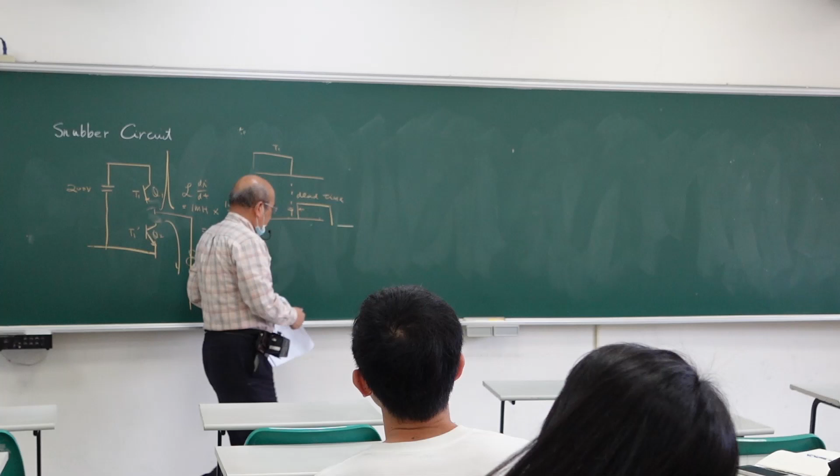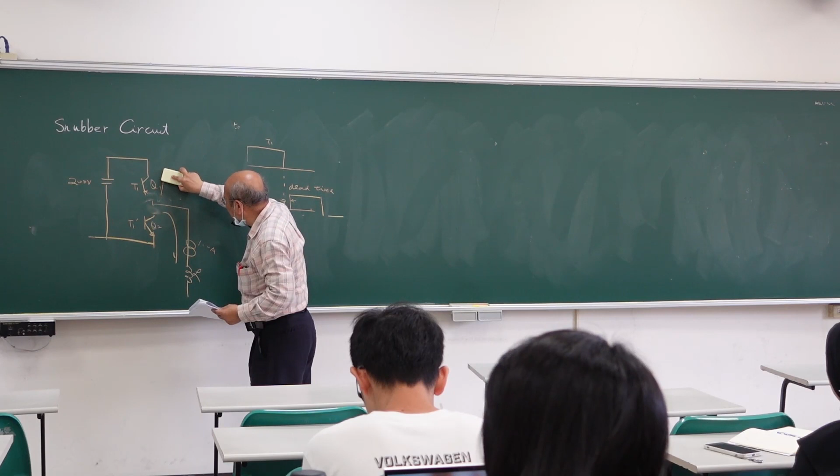You propose to your advisor that you have this problem, and your advisor asks you to propose some idea. So how can we solve this problem? You say, oh, it is okay, if I can put a free-wheeling diode here, maybe I can solve the problem.

So if the current goes here, you turn off Q1 and turn off Q2. Then the diode will automatically turn on, right? We can go to the diode. If the current goes this way, then we can go this diode, right? So the current goes this way, this diode automatically turns on. The current goes this way, this diode automatically turns on. Then we solve the problem.

Okay, we say, oh, it is good, and we can turn off the diode. So this is D2, automatically turn on. So you can see the D2 will fill this space, right? So the D2 is ideal, then no problem.

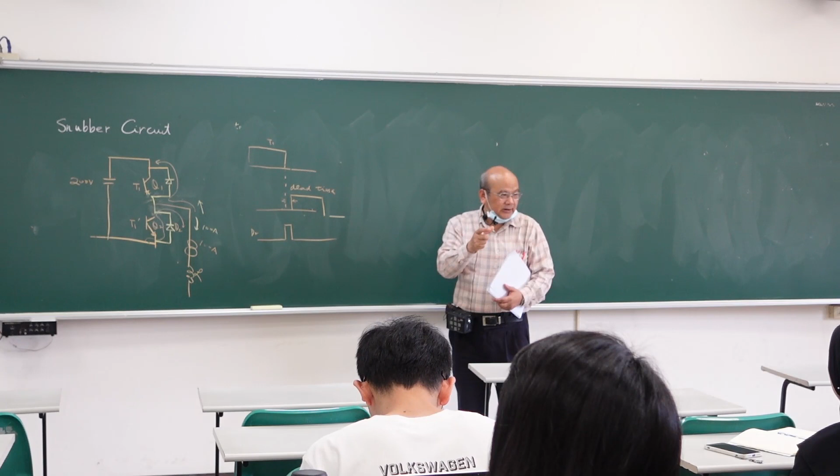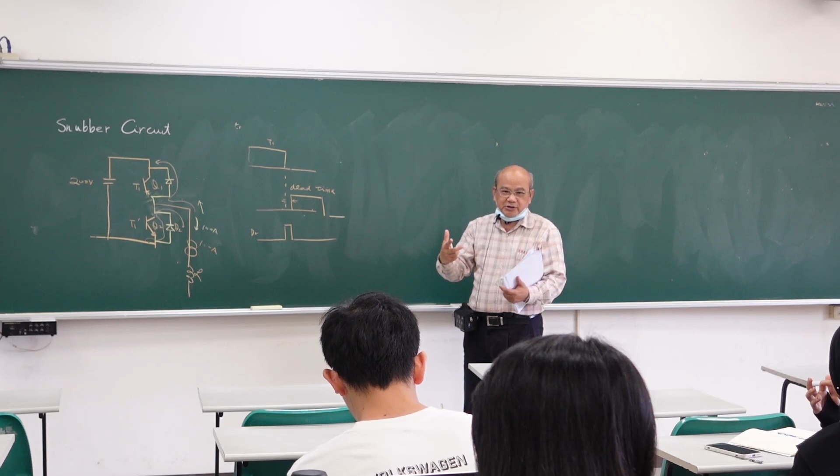But do you get any ideal diode? What is an ideal diode? If you want it to turn on, it immediately turns on. Do you think your diode will cause some delay? Yes, because it is a physical diode. So if you have a very physical diode, it could be like this.

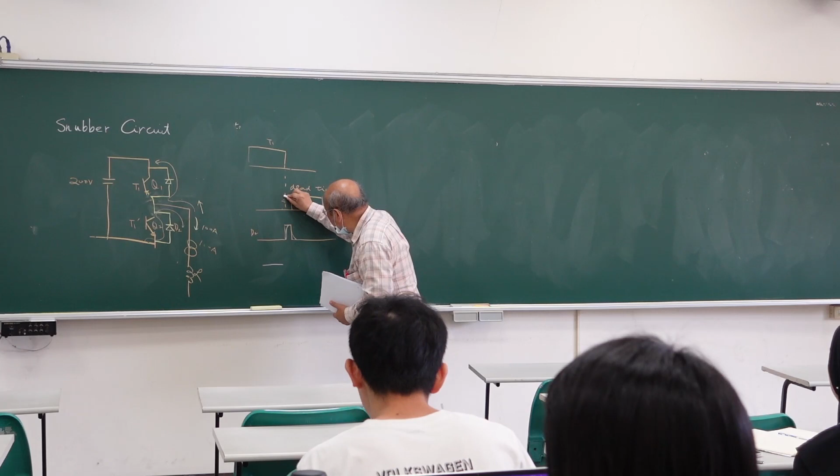It creates delay. So if it creates delay, then what happens? During this turn off, and the diode not turn on yet, then what happens? No path, right? No path. So now you turn off Q1, you turn off Q2, but the diode waits for 1 microsecond. But now you are waiting, so the diode is not turned on yet. Then everything turns off, then spike, right? So you still create a spike.

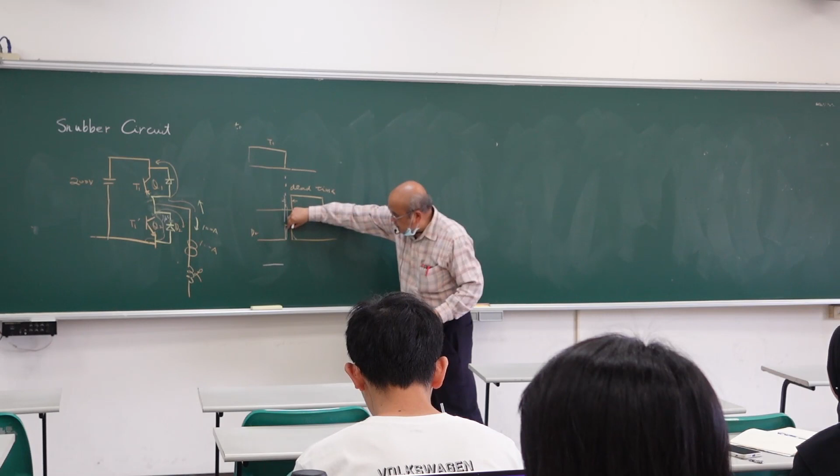So you think the diode can improve because it can improve this time interval, but not improve the whole interval, right? So after you try the diode, you say, I'm sorry, it doesn't work. Then what can you do?

So now you have to put some location to absorb the energy, right? Because you have inductor energy. Inductor energy should go somewhere. So if you have a flooding, the level of the river increases quickly, then you have to create some maybe lake or some river to get the water to flow out. Otherwise, this is a city, the water will go to the city, and every home will be flooded, right?

So we have to find a way to let the current go through. So how can you do this? There is one way. You say, oh, I can put a capacitor here. Maybe a capacitor here, capacitor here. And I can put a resistance here to limit the current going to the capacitor, not too huge, right?

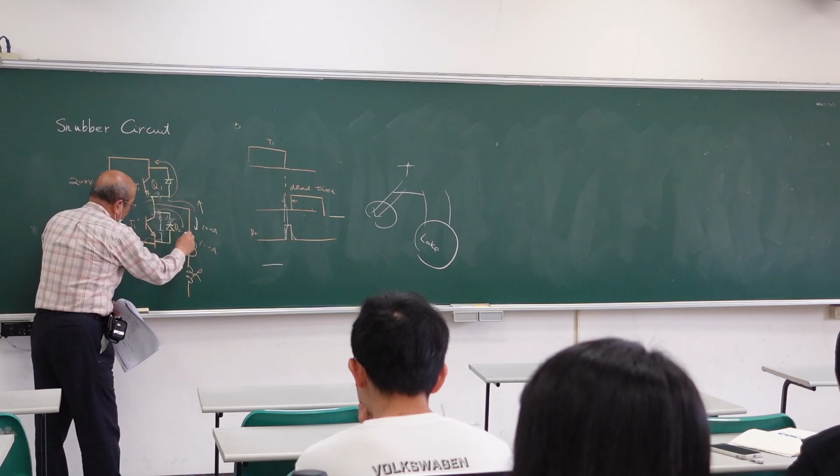Then after this turns off, this turns off, this turns off, then you have current here. Maybe you have current, we say, go this way, then what, or go this way. Then what happens? You have current go this way, then the current can go to the resistor, to the capacitor, and charge the capacitor, right? So the capacitor can absorb the energy, right?

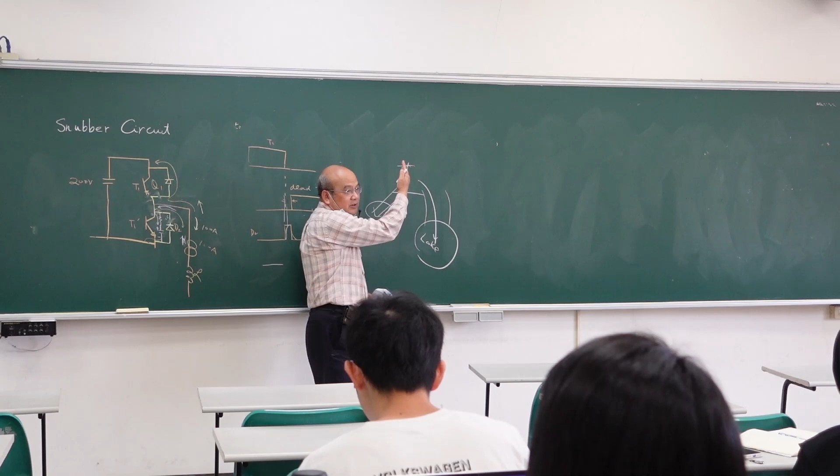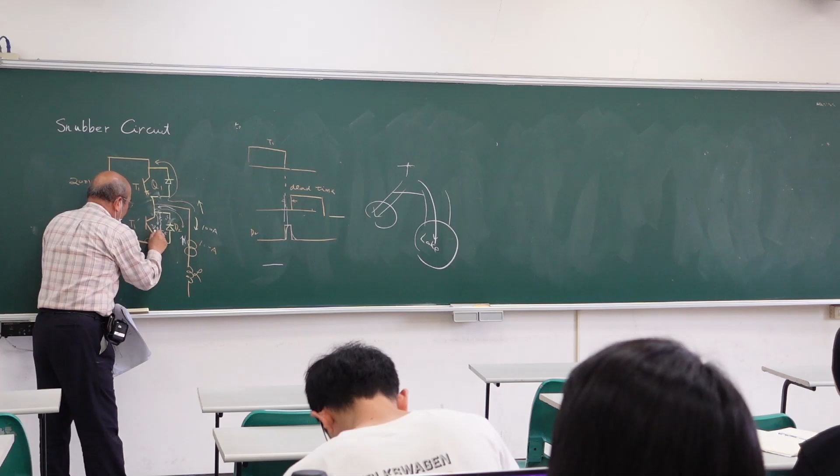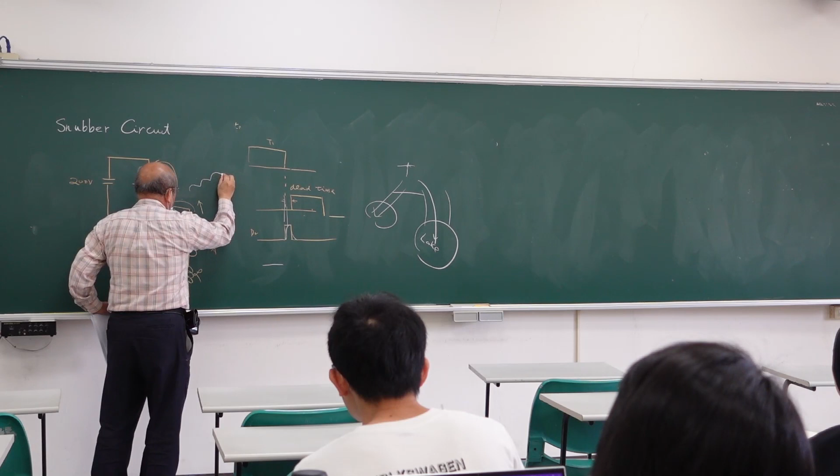If the current charges the capacitor, how about the capacitor voltage? The capacitor voltage increases. And the next time you charge again, the capacitor voltage just increases, increases, increases, then becomes infinity. Then one day the capacitor burns out.

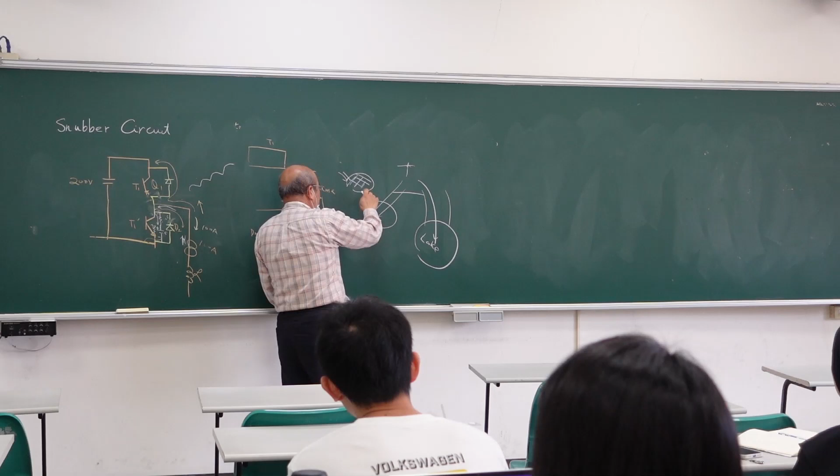So you have a garbage dump. Every day you put garbage, and then tomorrow you put another garbage, and after 1 month it becomes a small mountain. After 1 year it becomes a big mountain, right? Because you always dump. So if you always dump, then the voltage becomes infinity. Then it damages the capacitor.

So what should you do? If you have a garbage can, you can dump garbage, but during the night you have to burn it. And then next day it becomes empty, right? Then you can dump again. If you have a lake during a typhoon, the lake water level becomes higher and higher. But after the typhoon, the lake should spread water to the city. Then it is okay, balance, right?

So what should you do? After you dump, next time, when the switch or this switch turns on, you have to create a diode here to make the voltage go through here to release the energy, right? So voltage increases, but next time when it turns on, I can use the voltage to go this way. Then I reduce the voltage. Then your voltage increases and decreases, increases and decreases, then balances.

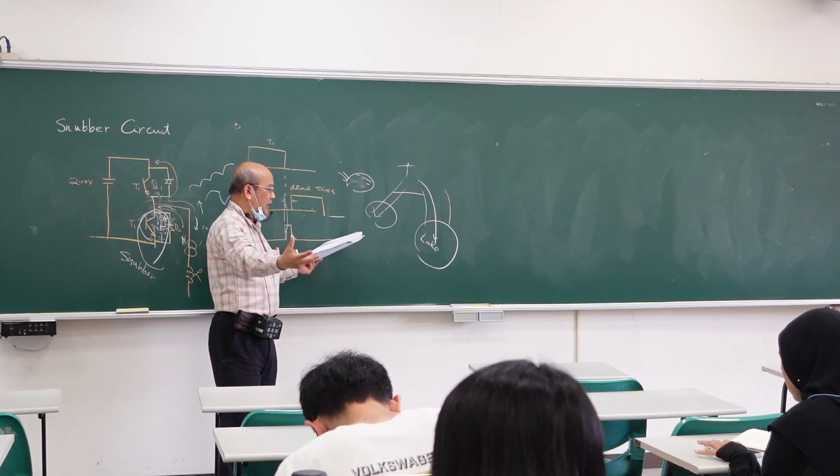So what is this? A snubber. It is like a lake. So I absorb the energy. When the switch turns off, I get energy. When the switch turns on, I release the energy. Then get energy, release energy, get energy, release energy. Then I'm okay.

So then we can have a very brief conclusion. If you have an inverter here, this is an ideal inverter. How many switches do you use? 6 switches.

So your motor is here, your motor is here. This is A phase, B phase, C phase. Then this is your neutral.

In order to get the energy balance, you had better put a free-wheeling diode. So after Q1, Q2 turn off, you can go to the free-wheeling diode. But before your free-wheeling diode turns on, you have some energy. The energy should be dumped to the capacitor.

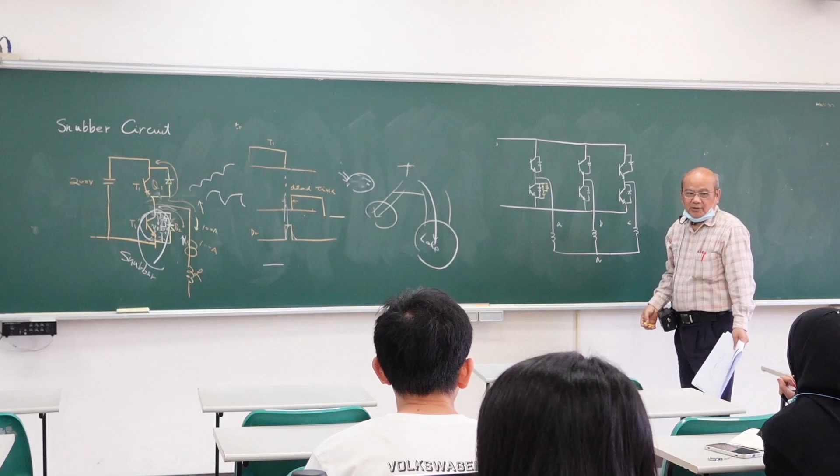So you have to put a snubber here. You have to put a capacitor here, resistance here, and then diode here. So we call this a snubber. So each switch needs 1 snubber.

How many snubbers do you need? 6. So you need 6 snubbers.

Six number. So you can see this is device, this is device, this is device, that is device. So you have 6 devices. But you have RCD snubber here, snubber here, snubber here, snubber here, snubber here, snubber here.

So you become huge. But what is power electronics? Small size. Then you become huge size. What is power electronics? Reliability should be better. But you put so many devices, and this device creates heating. Is it good? No, it is not good.

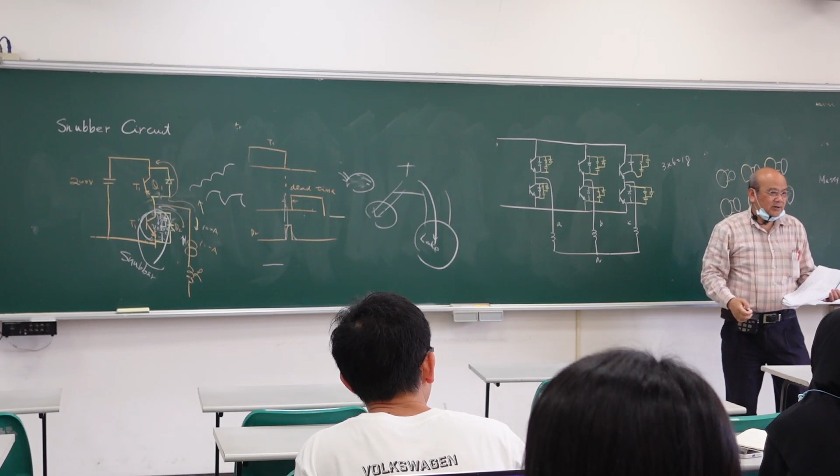So you see, it is messy. It is a headache because you have to put a lot of devices here. So you can see 1, 2, 3, 3, 6, 18 devices. So you have to work for this 18 devices. So it becomes a headache.

So why? Because you need to take care of the spike. So how can we select the resistance? How can we select the capacitor? How can we select the diode? If you put the capacitor too small, then what happens?

You turn on, turn off. For example, turn on, turn off. So maybe you have voltage here. If you do not use any snubber, then the voltage is like this. So this is 200, this becomes 800, minus 800, this is minus 200. Then you can see it is a huge voltage, right?

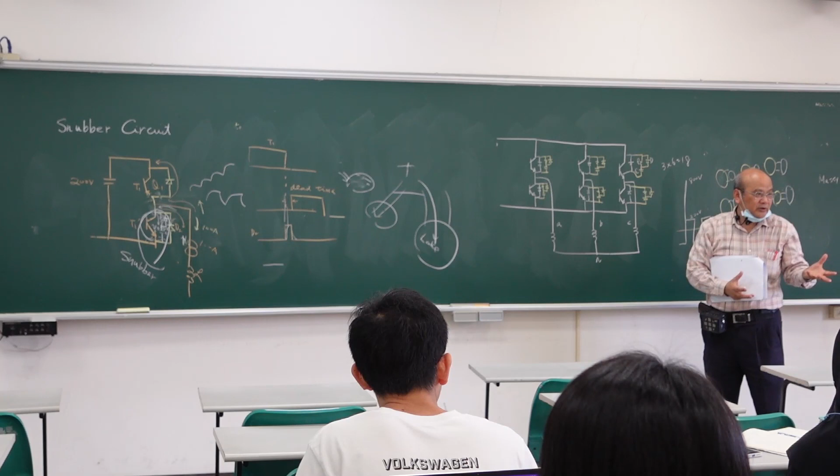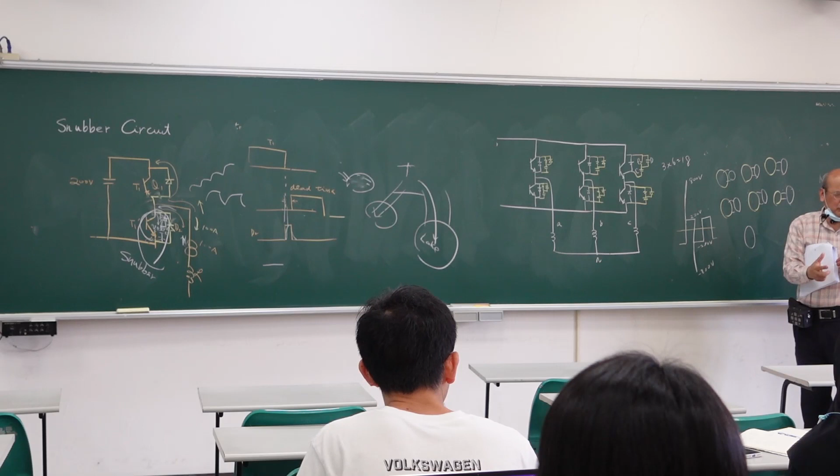Short, but huge. Then what happens? It damages this one, this one, this one, without any smoke. Nothing happened, just damage. So if you burn on, burn off, if you burn an IGBT, you can see smoke because it's too hot, because the temperature is too high. But if it is due to spike, no smoke, just damage. Then you replace it again, and it damages again.

So because of the spike, you design the snubber, but you choose a small C. Then the voltage becomes like this. Like this, we just saw before, right? For example, like this. So we call this ringing.

So how can you solve ringing? You can increase capacitance or you can increase resistance. If you increase resistance, then it becomes like this, because you use your resistance to absorb the energy. So the resistance can get the energy. But the resistance becomes high temperature, heating.

But it can absorb the energy. So you can increase resistance to get damping, to increase damping. So we call this damping. So if you have swinging, this one, you increase damping, then it becomes only one type. So we call this damping.

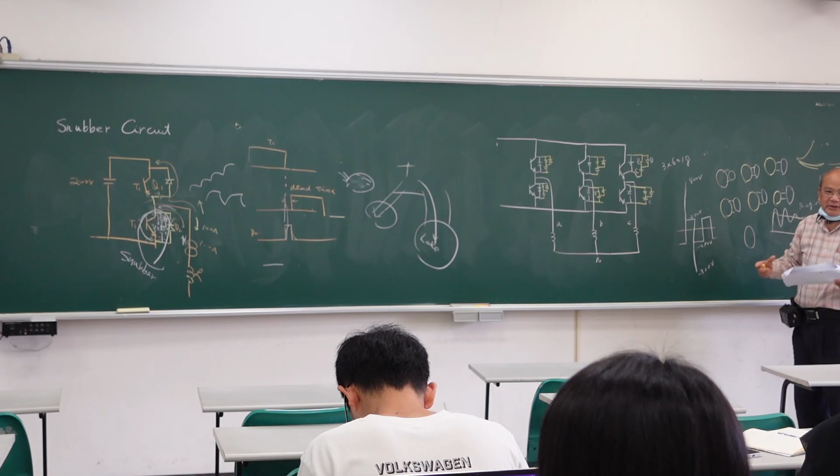If you drive a car in the snow, then your car just rotates. Then you can put something to dampen, increase the damping. So we call this the damping.

But if you put too much resistance, then what happens? Your circuit just looks like this. It becomes too slow. So before, this is what you want, but now it delays a lot of time. So this is not good. This is also not good. We call this overdamping.

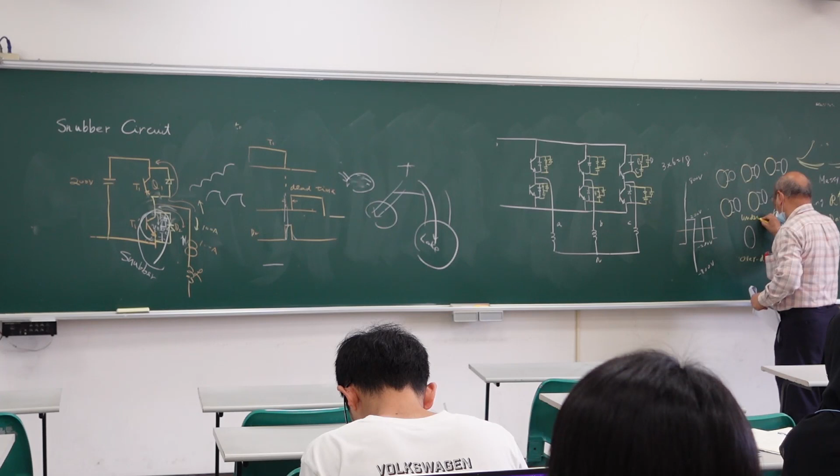We call this underdamping. So you have to carefully design the snubber. If you put too small a resistance, then it rings. If you put too much resistance, it overheats. If you put an optimal value, it is like this, then it is perfect. So you have to carefully design it.

But if you design an electrical vehicle, you put so many snubbers, do you think this is good for your electrical vehicle? Not good, because reliability is not good, right? Too much. Then how can you solve this problem?

Then some businessmen found some way. If you have this line and this line, what can you do? You have to use a line between here. If you use this line and this line, you have to put a line. But a line is equal to a small inductor, right? A lot of inductor here.

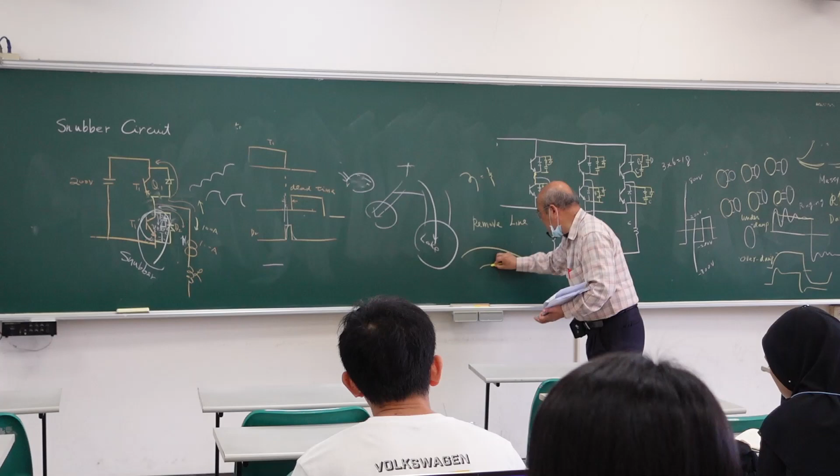Then you see the waveform is not good. So how can you improve your system without stray inductance? I hope I don't have any stray inductance, so I don't need a line. I have to remove the line. I cannot use a line, because a line from here to here is equal to one inductor, right? So I have to avoid using inductance. How can I do this?

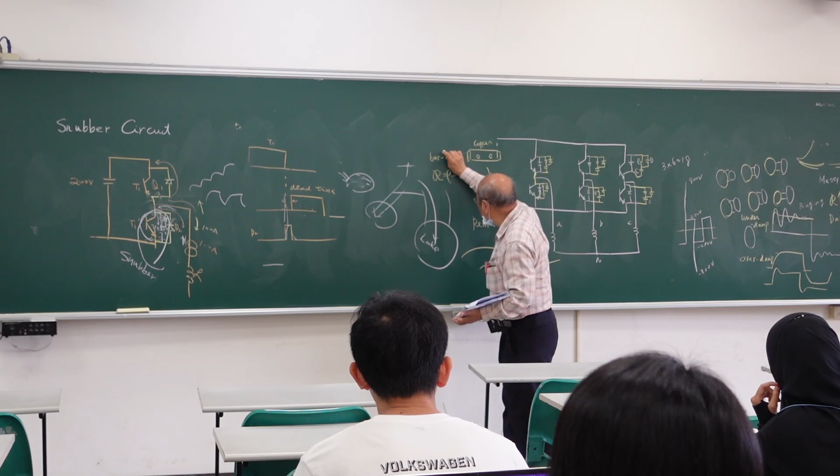So we create a bus bar. We call it bus bar. What is bus bar? It is copper, and very thick. I put a hole, so you can connect your device directly to the bus bar. Then no inductance, because it's only resistance. Resistance is related to area and length. If the length is longer, resistance is larger. If the area is larger, resistance is smaller. So they put a lot of area. This is large, this is small. Then resistance is almost zero, right? Almost zero. But it is expensive.

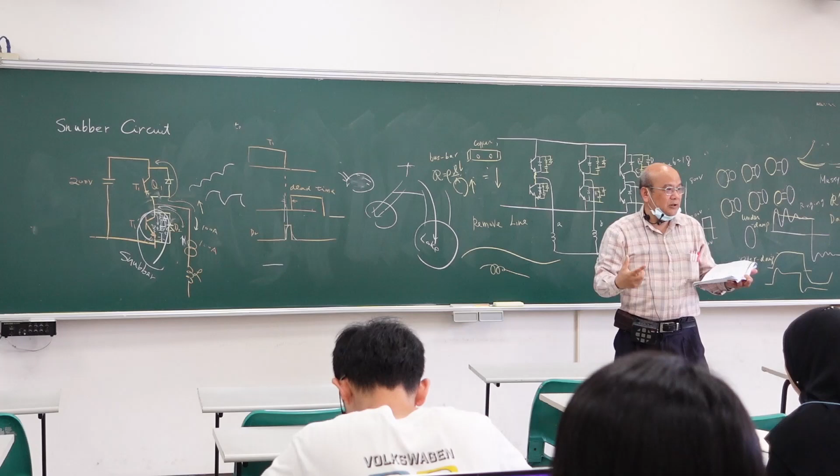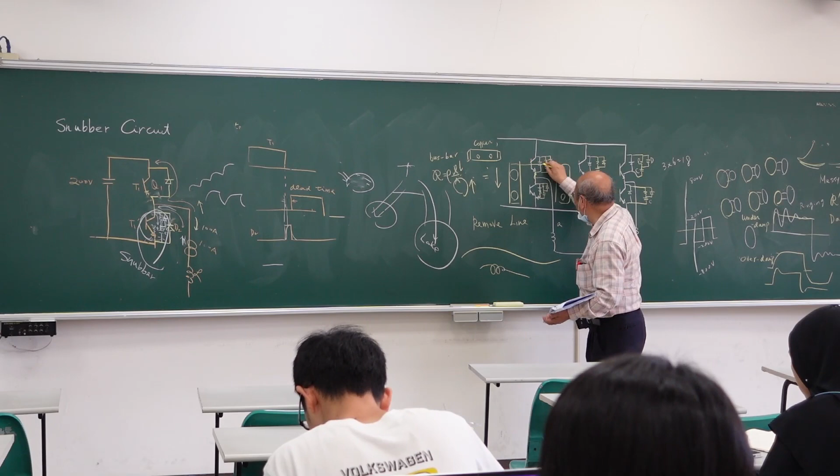And we do not use any line. It is copper. Copper has no inductance. So if you see the electrical vehicle, they don't use any line. They use bus bar. From here, you can see bus bar, and this one here, and here also bus bar. This one here, this one here. From here to here, also bus bar. So no line, no line. It is important, but it is expensive.

So now people use a lot of bus bar, especially for high power, like electrical vehicle, renewable wind generator. They have to use bus bar. They cannot use wire. Wire is not good because wire has inductance. Inductance creates spikes, so you have to avoid using inductance. So we call this the snubber circuit.

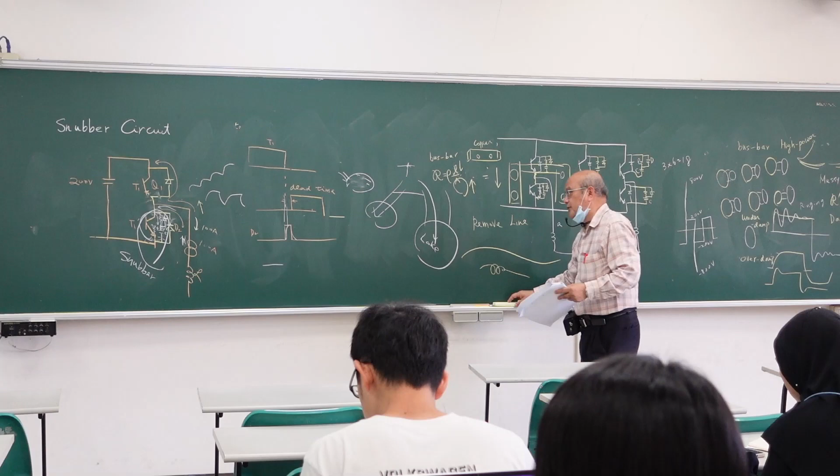So we finish the snubber circuit. Then we will move to the current source inverter. We have another video that discusses the current source inverter. So what is an inverter? How many types of inverter are there? Two types: voltage source inverter and current source inverter. What is voltage source inverter?

How can you do the modulation? We have 6-step modulation. We have sine wave PWM. We have space vector modulation. We have hysteresis control. We have triangular control. We have predictive control. So we mentioned a lot of modulation methods for VSI, right?

So what kind of application is VSI? What kind of device can you use? You can use IGBT, you can use MOSFET, you can use silicon carbide. So you can use power devices at high frequency, right?

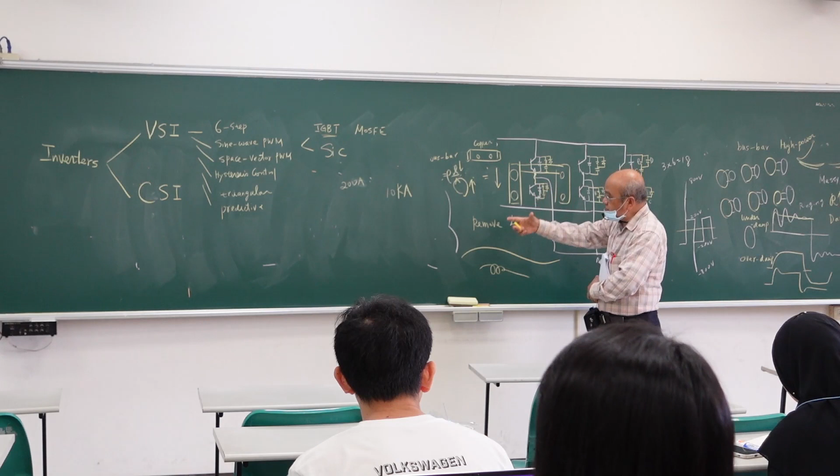But can you provide 10 kiloampere for IGBT? No. Then how can I design this system? I need a wind generator, I need a water pump storage, I need 10 kiloampere - this is the basic requirement. I have a static var reactive generator, I need 10 kiloampere. So in power system, every unit needs 10 kiloampere. I need huge current. So can I use VSI? The answer is no, because your device is only maximum 200 ampere.

So in this case, what can you do? You have to go CSI. This is a high power application, like power system, like HVDC, like steel plants. What should we do? We need a current, input current. So our input is not voltage. Before, we have a voltage - we use a capacitor, then we change the voltage into current.

So this is motor: A phase, B phase, and C phase. But this is voltage, so we call this VSI, right? VSI. Now what do we need? We need current source - this is current source. And we put the current source into 3-phase, and then we output 3-phase current. So this is 10 kiloampere input current.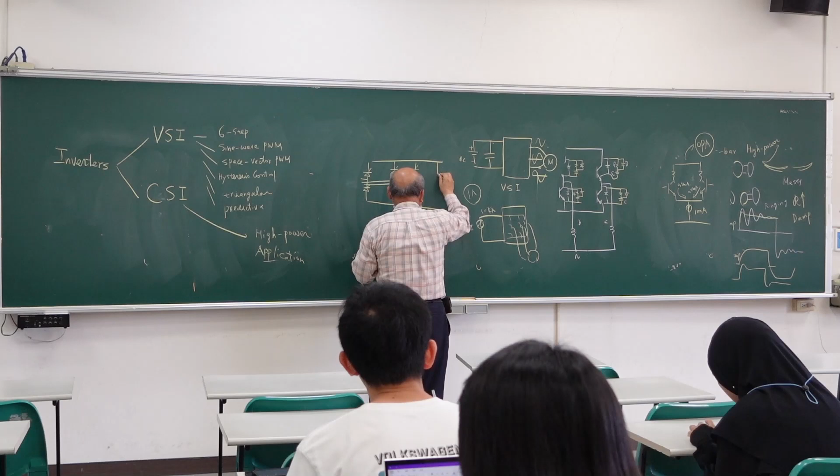So we design SCR. We have 3-phase input, and we have 3-phase output - so this is output. We call this VR. So we have 3-phase output, which we call 3-phase AC to DC phase control.

Not rectifier, but phase control. So we can control the phase, the delay angle alpha. Then we can calculate that VR is related to alpha, cosine alpha multiplied by something. So we can adjust alpha to adjust VR. We call this phase control.

Converter. So we can adjust VDC by controlling the delay angle, right? So if you have SCR, then what can you do?

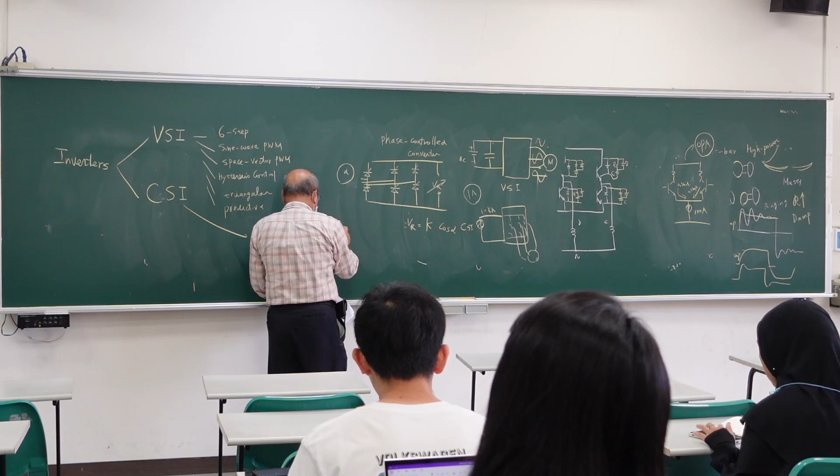Then you can use AC, design SCR to control the load. So you can adjust alpha, then your output could be like this. So you can control alpha to control output, right? So we can see the output is related to alpha.

So no problem, and then we can put a huge inductor here - very huge inductor. If you open the CSI, you see this is CSI - this is inductor, this is circuit. The inductor is so huge. If you open VSI, you can see this is capacitor, this is circuit. The capacitor is so huge because you have to store energy, right? So we have a huge capacitor.

And then what? You have a switch, thyristor. So the structure is like this. Then we have a motor.

But now, here we need 1000 ampere. So it is like this: the input is 1000 ampere DC current, then we convert the DC current into AC current. So we call it current source inverter. So if you compare it to the voltage source inverter, it is like this one.

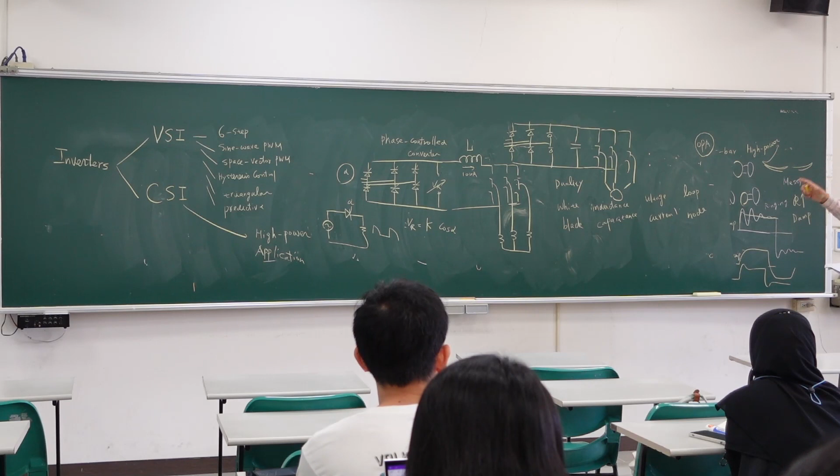So if you have Thevenin theory, then you have duality - Norton theory, we call this duality. If you have a loop, what is the duality of a loop? We call it a node, right? So we have duality in electrical engineering. So if we have a voltage source, what is the duality of a voltage source? Current source, current source. So the structure is like this.

But now we need to create input current, constant current. How can we create input constant current? So then what do we need? We need a sensor. So this is IS, and we have desired current, IS star. So we have desired current 1000 ampere. We have real current. Then we can control alpha, the firing angle.

Then we can control the firing angle to control the VR. So now it is like this. So we have a command here, 1000 ampere - this is our command. And this is the real current.

So at that point, we said we need 1000 ampere, but at the beginning, 0 ampere, right? Because it is the beginning. Then what should we do - should we increase voltage or decrease voltage? We have 1000, but now we only have 0. The error is 1000. If we need 1000 ampere, then should we increase the voltage or decrease the voltage? If you decrease, it becomes 0, then you never reach 1000.

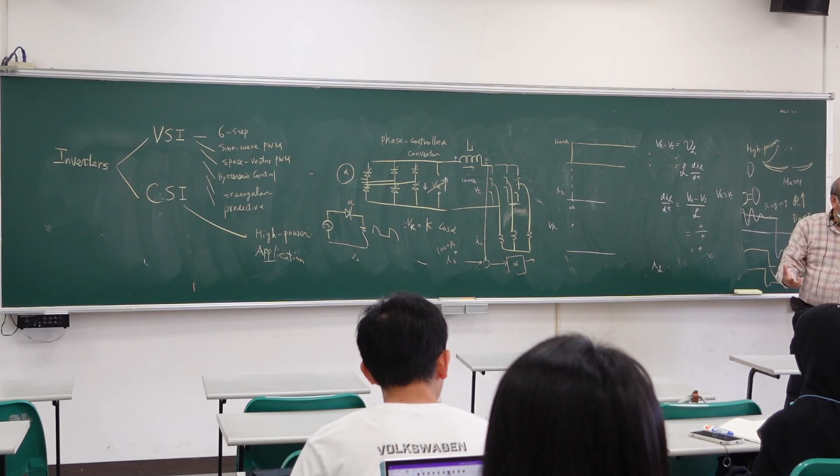If the dI/dt is positive, will the current decrease or increase? If you think increase, raise your hand. If you think decrease, raise your hand. If this is positive, then the slope is positive. If the slope is positive, the current will increase, right? So you can see this is larger than this, this is positive, positive divided by positive is positive. dI/dt is positive, when t increases, IL increases. So the current will increase, right?

And after the current reaches more than 1000 ampere, it is too much. So after that, you have to decrease the current. So here we keep VR. If you want to decrease the current, what should you do? If this is larger than this, current always increases, right? Now you need to decrease your current, so VR should be reduced.

Then you found that your current is too small. Then what should you do? You have to increase again. If you want to increase, then your VR should be increased, right? And then you found that it is too much. So after that, I needed to decrease. If I decrease, then I needed to decrease the VR. So the waveform is like this.

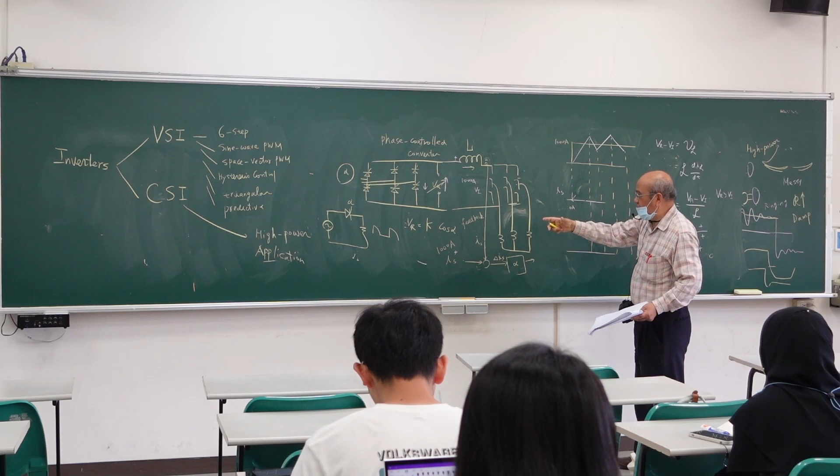So you have to detect this with a current sensor. You have a current command, so you have current error. If the current error is positive, which means you need more current, you have to increase VR. Then current increases, and then you found that you are too much. Then you have to decrease your VR, then the current will decrease. So you can control the input voltage to control the input current. So you can see we can get the waveform like this.

But now you see the ripple is too much. If I want to reduce the ripple, what can I do? So when you want to increase the current, then you have a very huge VR. So dI/dt is VR minus VI divided by L. So VR should be larger than VI, then you can increase the current. So current will increase. If you want to decrease current...

So you have VR minus VI, it is L dI/dt. But now VR is smaller than VI... so dI/dt equals VR minus VI divided by L. But VR is smaller than VI, this is negative, this is positive, current will decrease, right? So if I need a very smooth current, should I increase the inductance or decrease the inductance?

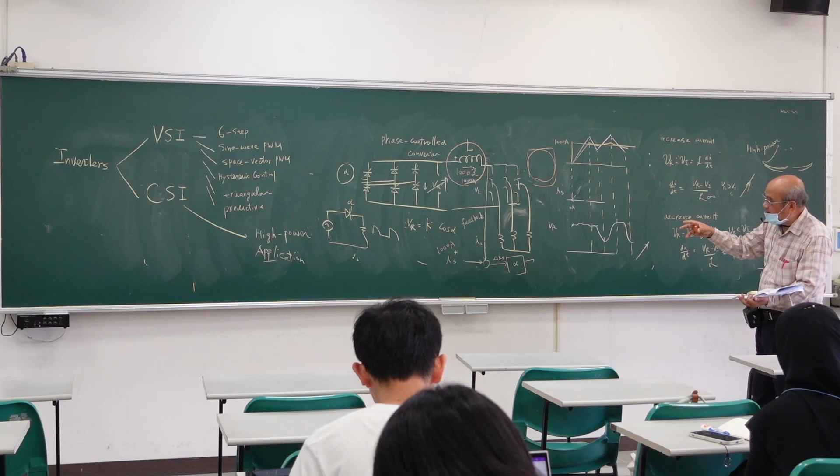So the current source comes from your design, not from the supermarket. You cannot buy it because you have to design it. Then, what is the disadvantage of the current source? You need feedback.

So this is CSI. How about VSI? VSI uses a rectifier and a capacitor. Do you control the VDC? No, you just design it. So sometimes if you put a heavy load, then the VDC, originally you want 600 volt, but now it drops to 500 volt. Do you care about it? No, you don't care. So for VSI, no feedback. We just let it go. So no feedback for VDC.

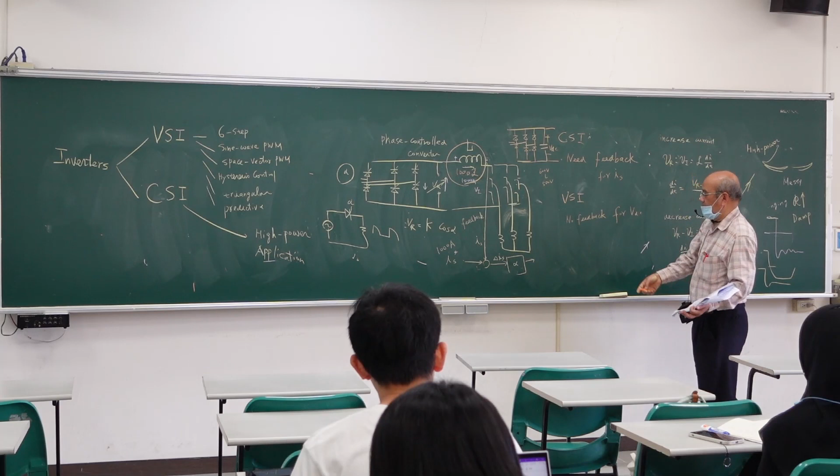For CSI, you need feedback. So you need to feedback. So it becomes more complicated.

If one day this line is broken, what happens? Say some mouse eats your line and it breaks, and you set 1000 ampere, but the feedback is 0 ampere. So you need more current, right? If you need more current, you increase the VDC, still 0, increase again, still 0, increase more, then you damage your circuit, because it becomes infinity.

So we need feedback. If the feedback fails, then your system is damaged. So you can see CSI is more challenging than VSI.

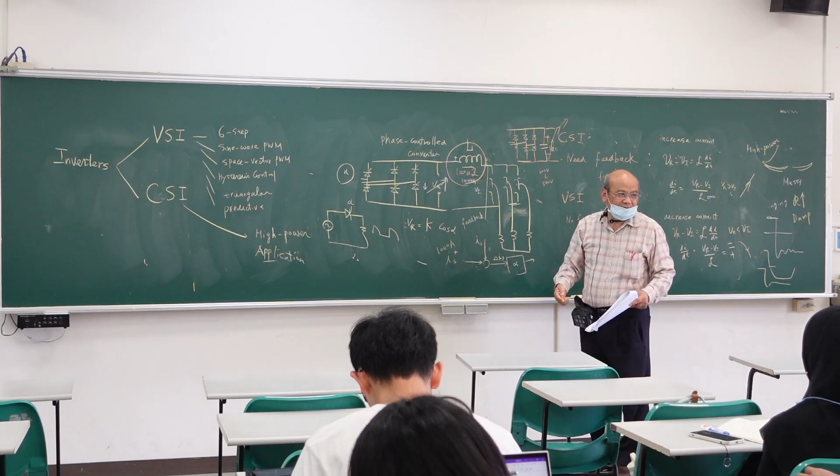So if you do research, do you like to do CSI? You have to control a current, a constant current, and then you spend 1 year designing this circuit. Then everybody graduates, and you're still working on it. So do you like to do this? No. So only a few people like to study CSI because it is too complicated.

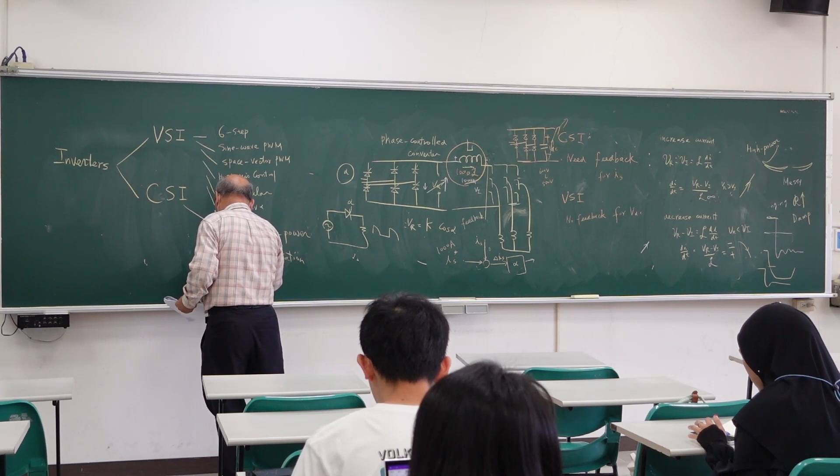So the CSI is like this. It is for high power application. We use SCR, we use thyristor for the CSI. Now we want to discuss how we can determine the switch.

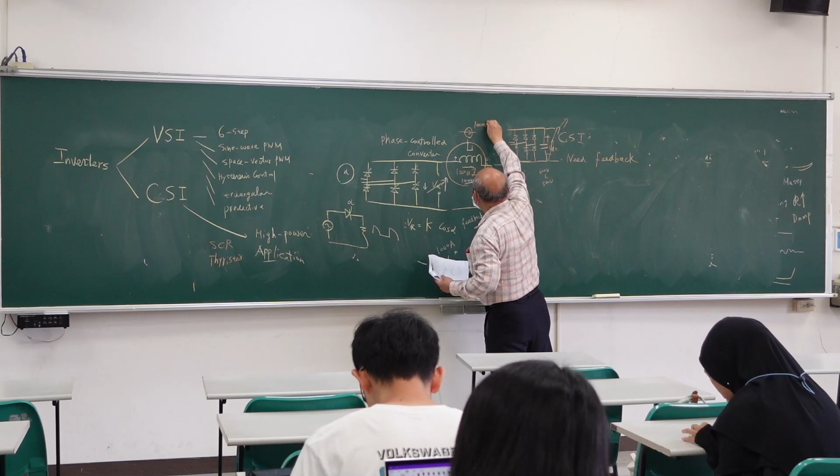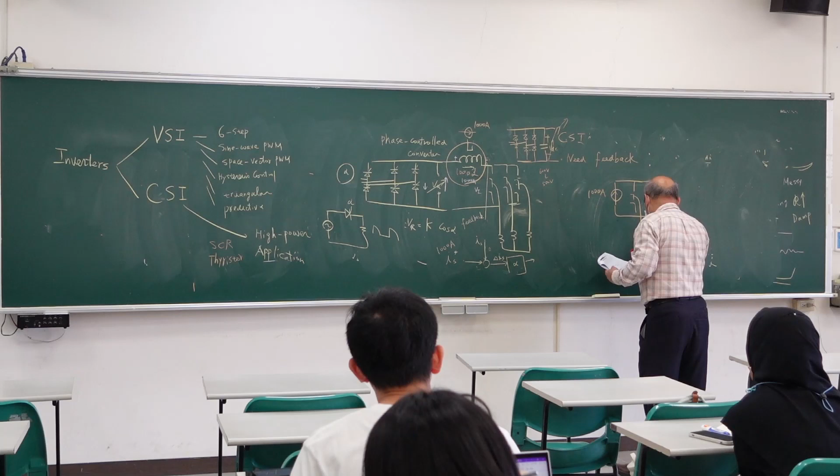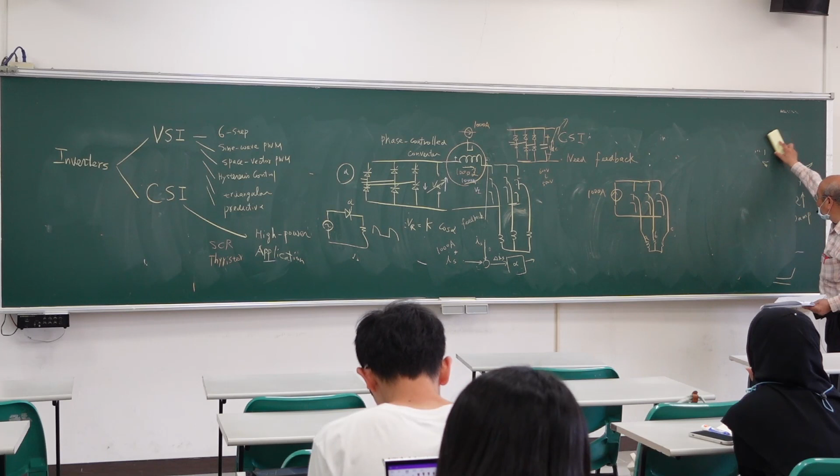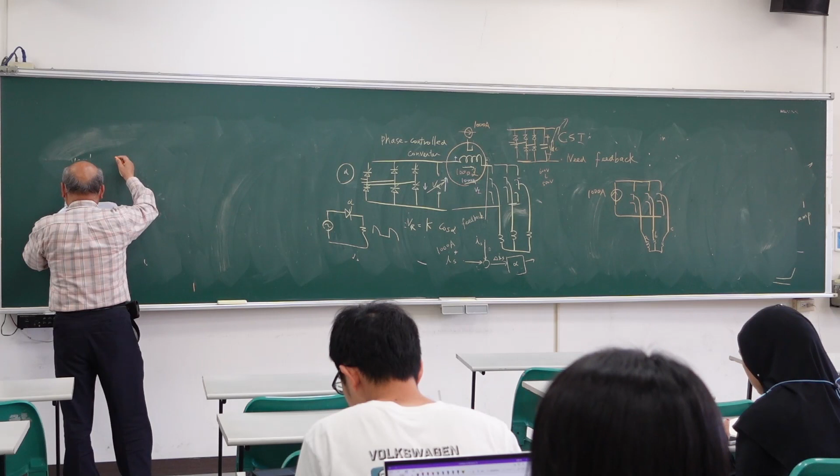So we want to discuss ABC phase. This is our structure. How can we design the switch? This is the issue. We want to design T1, T1 prime, T2, T2 prime, T3, T3 prime to obtain the 3-phase output. We call this switching states of CSI.

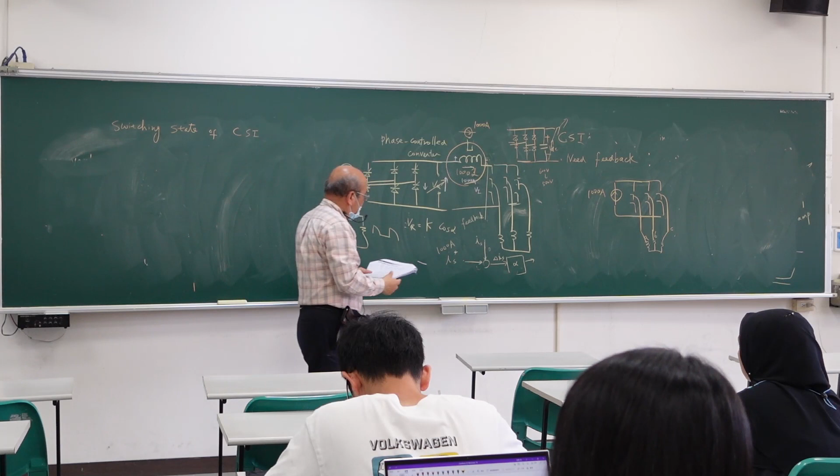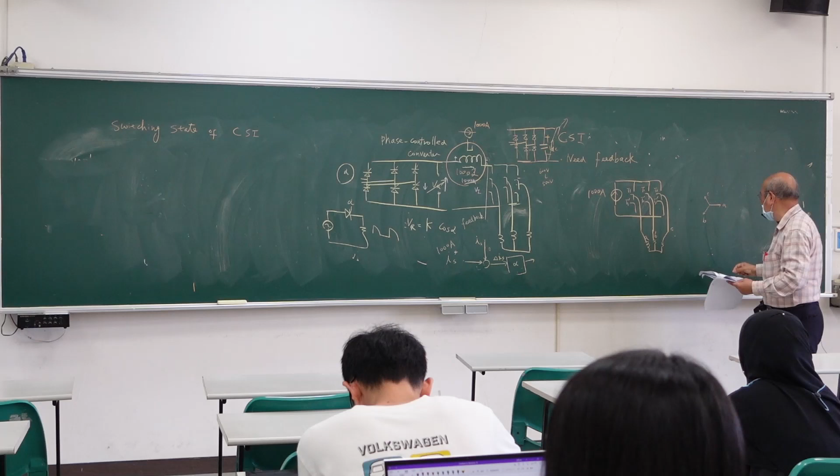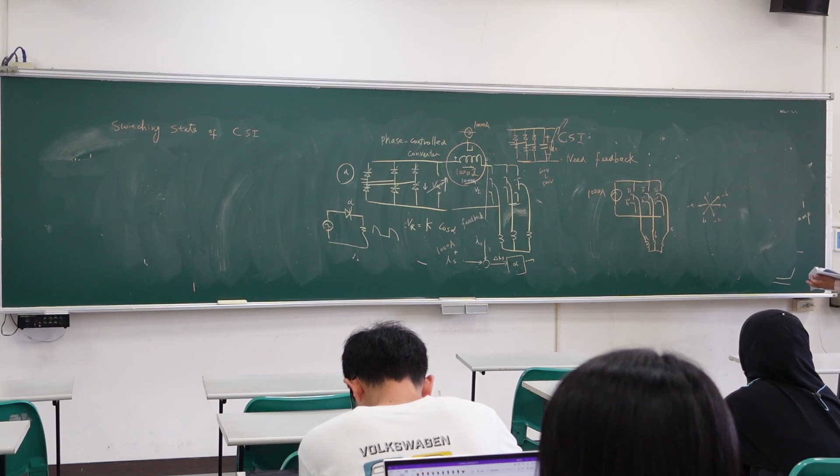So now we have 100 ampere here, with T1, T1 prime, T2, T2 prime, T3, T3 prime. So we have 6 states. We need A phase, B phase, C phase, and then we can have minus B, minus C, minus A. So totally we can have 6 steps. How can we control the 6 steps?

If we have 100 ampere here, what can we control? First we can turn on A phase, and go this way, back to B phase, and then return, with C phase here. So we call this A to B, AB.

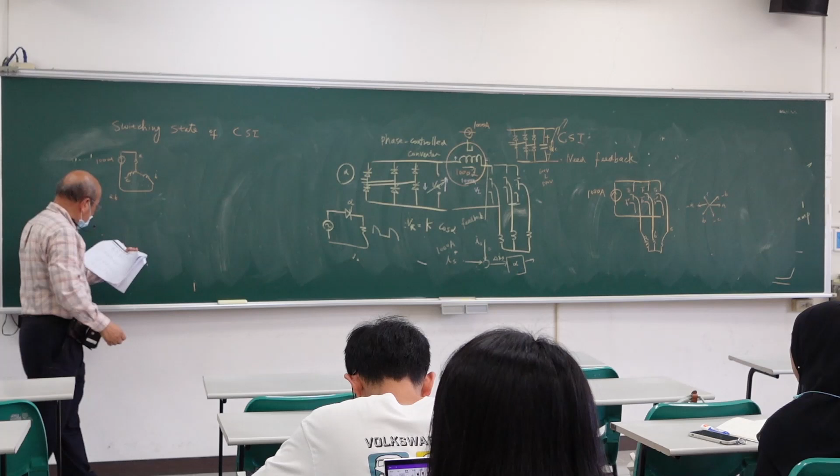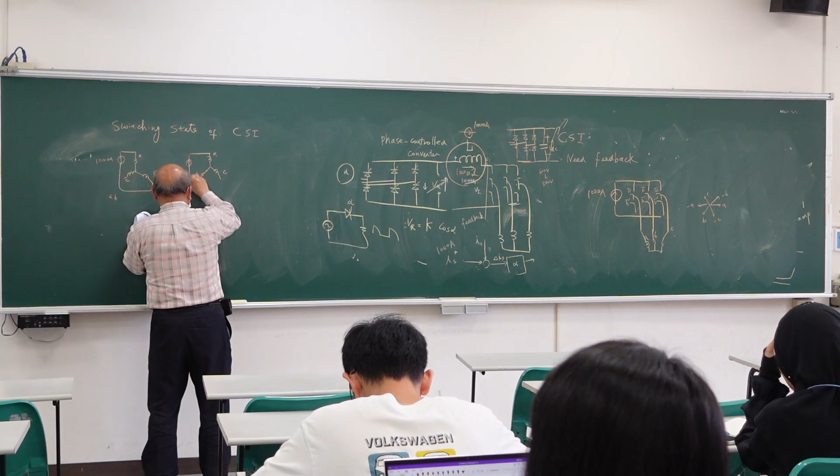Next step, we go this way. We have A phase, C phase, B phase. We can go this way, AC. Then next step, we have B phase, C phase, A phase. We go here, so it's BC. So AB, AC, BC. How about the next step?

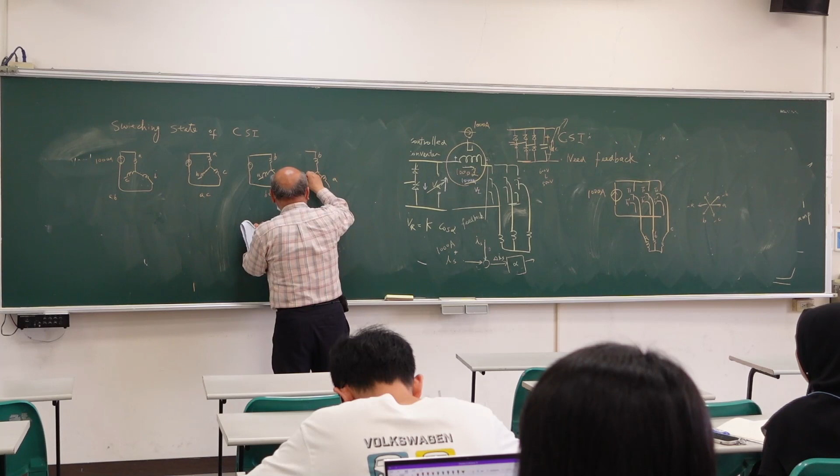Next step, BA. This is C, so we have one source here. So B to A, BA. And the next step, CA. This is B, so CA. And the next step, CB. This is A, so we go this way, C to B. So CB. So we have 6 steps.

So if we see the current in A phase, B phase, C phase, we have current here, current here, current here. So we have 6 steps.

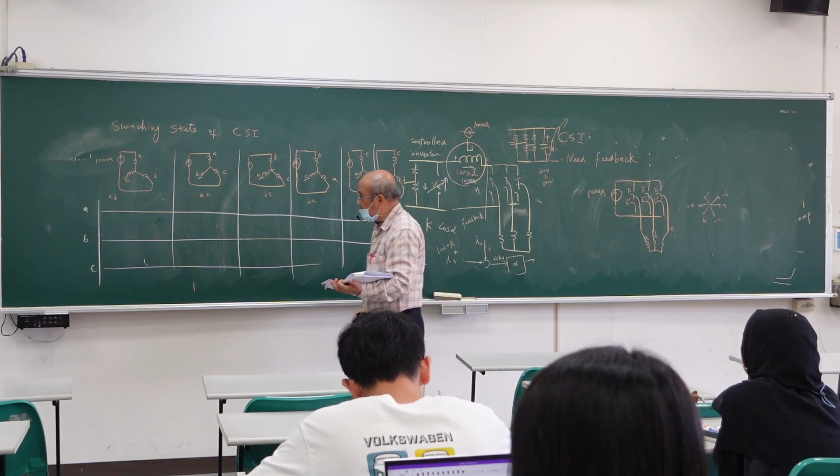So at the first step, A to B. A goes inside, this is natural. If we have current go from A to N, do you think A phase is positive or negative? You have a motor, then we have 1000 ampere go into A phase. Is the current positive or negative?

So you have a motor. Now we have 1000 ampere going to A phase, and from B phase it goes to output. So this is 1000 ampere. If current flows into A phase, is it positive or negative? If you have a load as input, and 1000 ampere flows from here, is it positive or negative? Positive, right? Because it is a load, and current going to the load is positive. So A phase is positive. Now the current goes to A phase, it should be positive. So A phase is 1000 ampere.

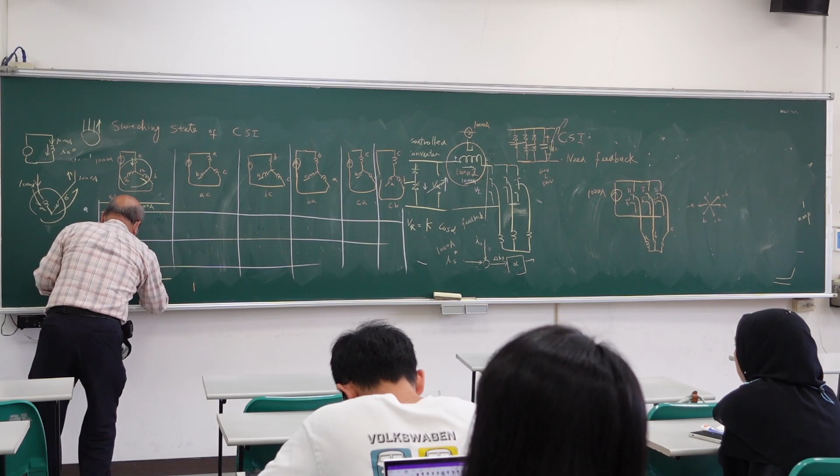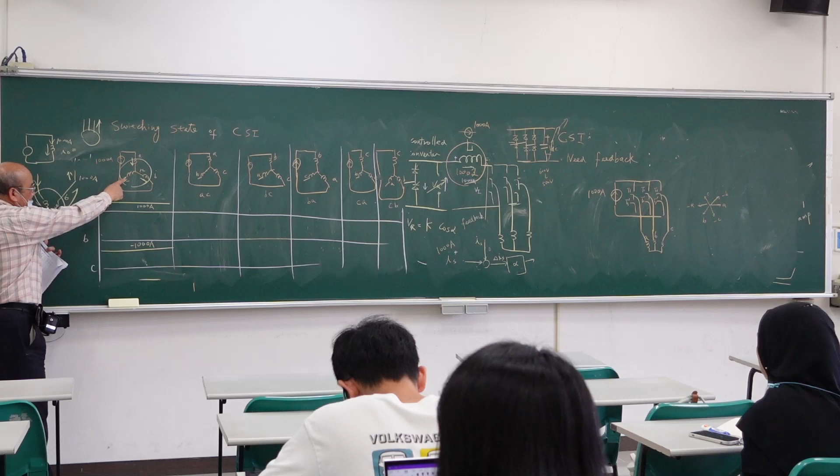How about B phase? Now we go from here, with the motor, we go this way. How can you call this? Minus 1000 ampere, right? So it becomes minus 1000 ampere. So we can draw this way. This is B phase, and B phase is minus 1000 ampere. How about C phase? C phase is here, 0, because it is isolated from the CSI. So C phase is 0 ampere. So we can draw A phase 1000, B phase minus 1000, C phase 0.